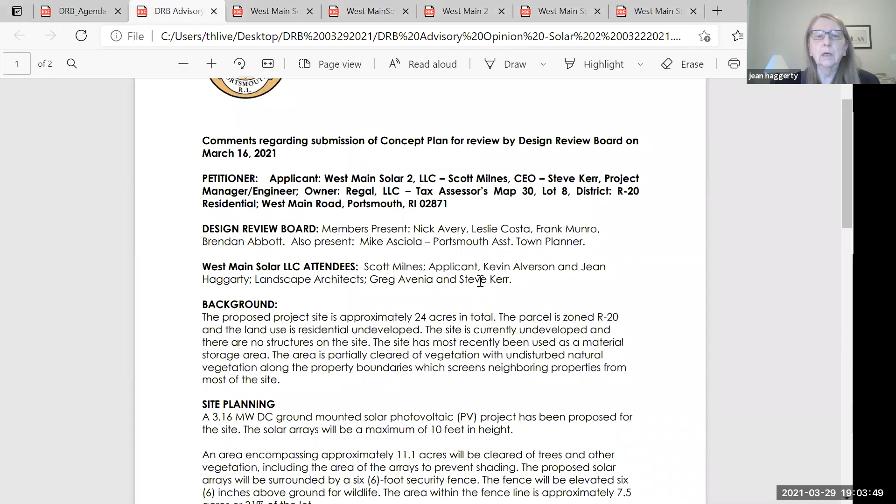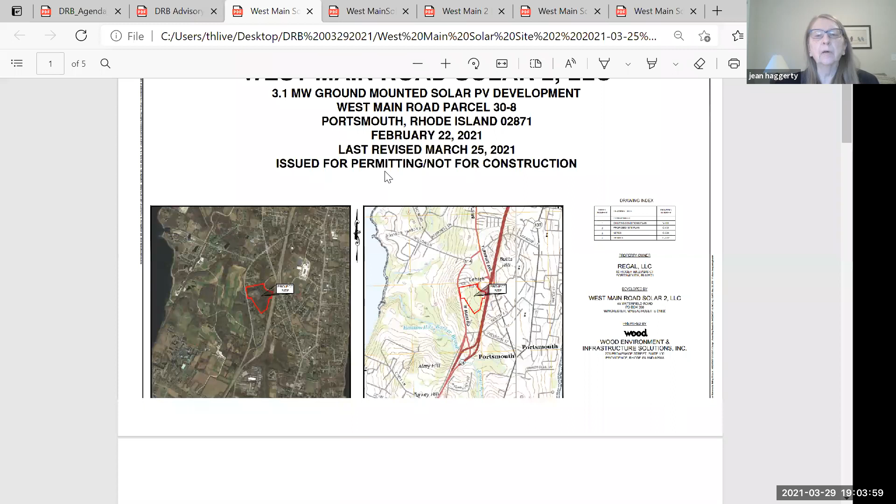Absolutely. Good evening, everyone. So when we spoke about 2 weeks ago, there was a couple of issues with the plan that we were still working out. Specifically, one of them was related to wetlands on the site. Since that meeting, we've had the wetlands flagged, and we have adjusted the site layout a bit. So if you go to the next sheet, one more sheet over.

So right down the middle of the plan, you'll see a line that's where the wetlands are. To the right is where the actual wetlands flags are, and the darker line is actually the buffer zone. We're trying to stay away from the wetlands, and as a result of that, we moved them inland, so they came more to the west since last time we talked to you.

That changed the array at the southeast side. We moved that a bit, and it resulted in some of the panels moving to the top left. So that northwest corner has a little more panels, and we've gotten further away from the wetlands.

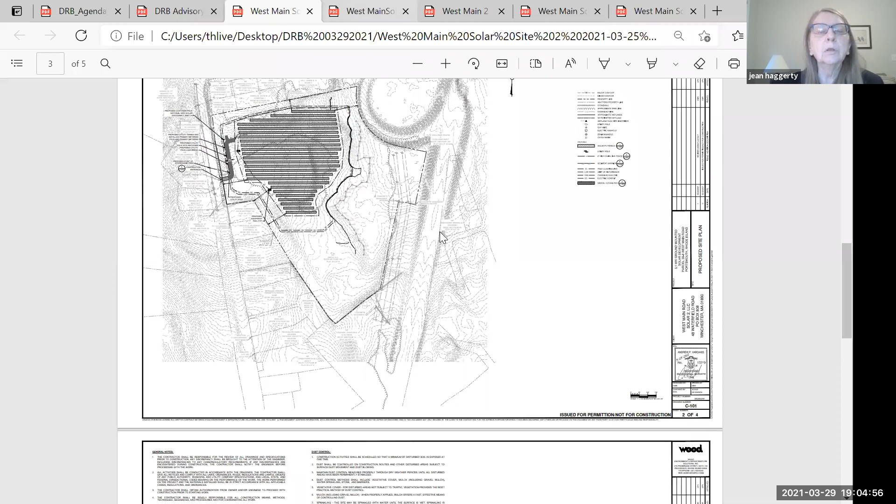As a result of that move, we also made some adjustments to the landscape plan. As we talked about at the last meeting, one of the big concerns was that the screening be appropriate, that we basically make sure we screen from all the different residential properties and from the roadside. On the top right-hand corner, that is the ramp from the highway. The wetlands all flow in that direction, so we're not having to move anything related to drainage on the street side. It'll all be on the inland side.

So tonight we have Kevin Alverson with us. He has revised this plan, taken into consideration your comments on the evergreens and plantings and locations. I'm just going to have Kevin quickly give you an update of what he's changed from the last submittal.

Good evening, everyone. Can everybody hear me? Yes. Great. My name is Kevin Alverson. I'm a landscape architect registered in the state of Rhode Island, office based out of Wickford, Rhode Island. I wasn't able to attend the last hearing, however I did review the board's comments on the landscape plan, and as Jean mentioned, responded also to the modifications to the alignment of the array based on the revised wetland flagging.

We were able to modify the planting design to utilize more evergreen tree species, particularly along the southwest portion of the site, which abuts some residential areas. As Jean mentioned earlier, the modification to the solar array layout required some additional buffering that we've placed along the northwest portion of the site, indicated at the top left area of the site.

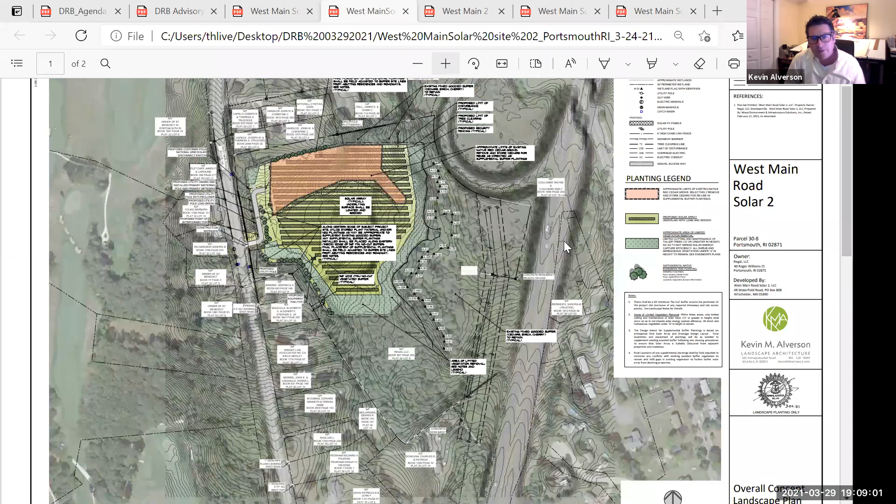You can see on the western side of your screen that we're actually trying to utilize and supplement plantings in that area as well, so we can minimize any views that come from the West Main Road portion of the site. In a nutshell, those are some of the revisions we've made to the plans in response to the comments we had, and also in response to the realigned wetland flagging out there. But I'm happy to answer any questions the board may have on that behalf.

Why don't we start with any board member that would like to ask questions to Kevin?

So what's the depth of the planting from a residential property line to where dense vegetation would be? What's the depth of that?

Along the western and southwestern areas, we have a 50-foot no-cut buffer that's existing. Then on the western side where the roadway is, we'd have about a 15 to 20-foot planting area.

In the southwest area, what we envision doing is having the no-cut buffer, a 50-foot minimum, and then a 15-foot plus or minus planting area where we would have to cut down some of the vegetation in order to place the plantings there.

But between that supplemental buffering and where the fence line for the array would go, we would have another 50 to 75-foot or so area, what we're calling a selective clearing area, which would really require just cutting any larger tree vegetation - anything over the height of, say, 12 to 14 feet - in the interest of trying to minimize any shade casting that might happen onto the solar array.

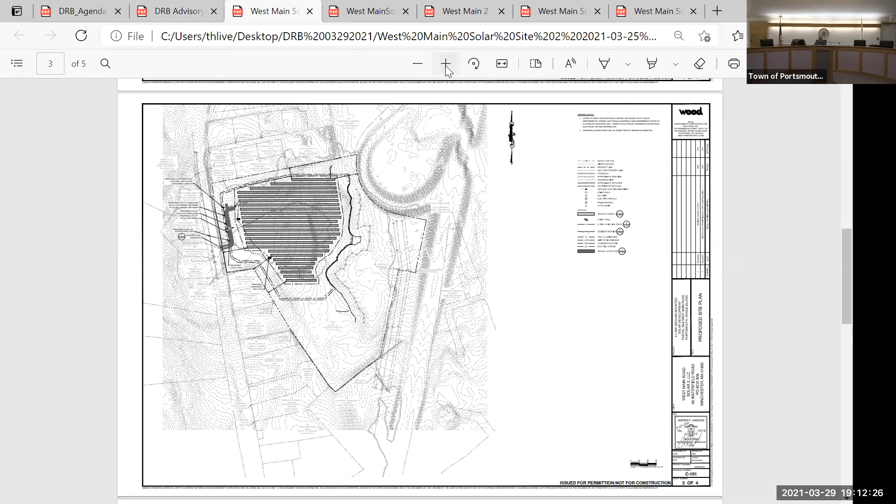So that corner, Kevin, the topography drops off pretty quick there. I'm having a little bit of trouble reading the topography lines. What is, say, from the fence to the abutter, to the closest abutter, like Jimmy Hall's house, for instance?

This is in the north, right, exactly right there. So I know you can't see this from the off ramp on 24, I've looked. And you really can't see any of the houses either. But my question is,

if we lose some of this taller vegetation, is he going to have a line of sight to it? Or are these replacement trees, the eastern red cedar, the pitch pine, will they grow enough in enough time to block that, to give it greenery year round? Is that the premise behind cutting down some of the bigger trees?

Yeah, at the northern portion of the site, we actually don't need to do any of that shade pruning because it doesn't cast the shade down onto the array. So quite literally where the line that you can see on your screen there that says TC, that's the tree clearing line. We don't envision any clearing, any shade pruning or anything necessary between the property line and that point.

So the existing buffer from that limited disturbance and tree clearing line to the property line with Mr. Hall's property would remain as is. There is some pretty considerable cedar vegetation that's in there.

So we don't anticipate having view lines into there, but it's certainly something that as the design is developed further and as we go along into it, if supplemental planting is necessary or replanting of some of those existing cedars that need to come out, that's going to be something that we'll be looking to do as part of this.

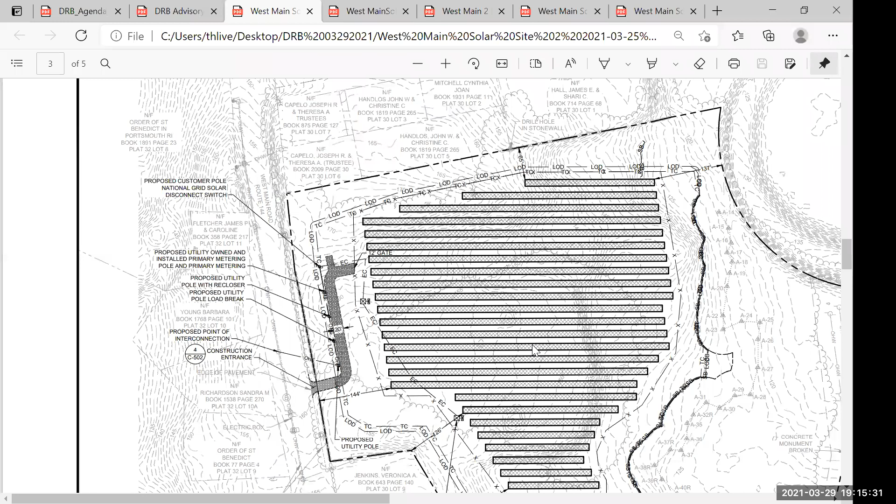Nick, could you weigh in, or I don't think Leslie has had a chance to join us yet. She's driving back from Providence and was going to try to call in.

Yeah, I guess if I could step in just to hopefully respond to that. I've done several of these facilities, and just the nature of the beast, I suppose, when it comes to planting a visual buffer.

It's really dependent on what the vegetation is within those areas in terms of distance and width. So the type of buffer we're proposing is a staggered, multiple buffer. It doesn't necessarily look like a green wall per se.

In some really tight situations, I've been able to accomplish that buffer in as little as 10 to 15 feet. In other areas, because we have more room to move, which is the scenario in this case, we can utilize the spacing better, planting within and around other vegetation that's meant to remain in order to cut down those sight lines.

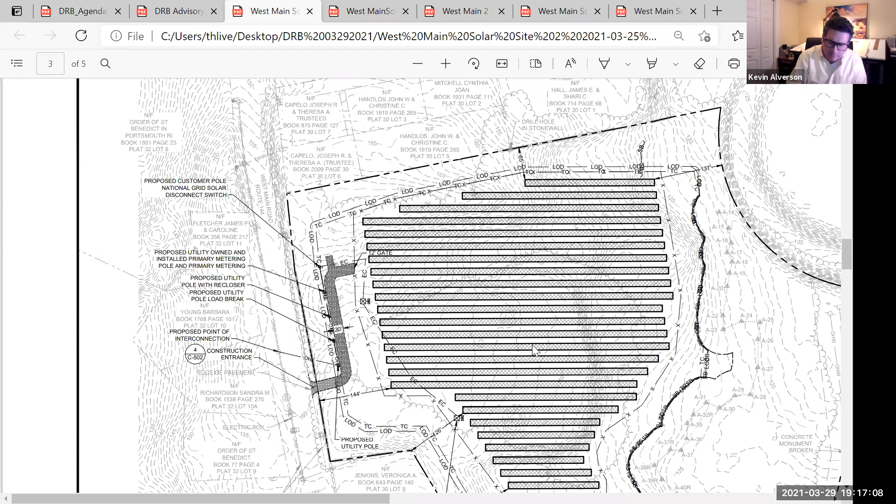As you can imagine, we can conceptualize and develop the buffer to the best of our ability, but until we actually take those trees down, we won't be able to see. We'll do everything in our power to minimize removal of vegetation, but then we'll see if you need a tree here, 15 feet this way as opposed to 6 feet that way. That's the sort of on-site buffer development we like to do.

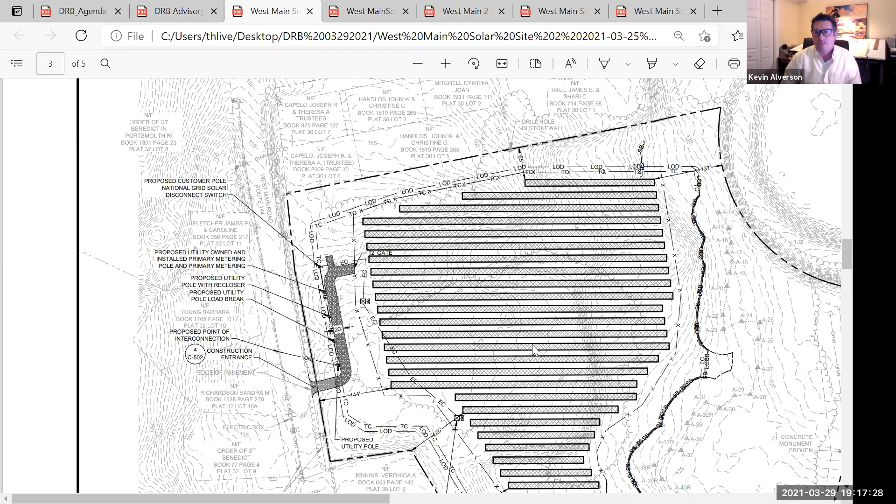Any other questions from any of the board members at this point?

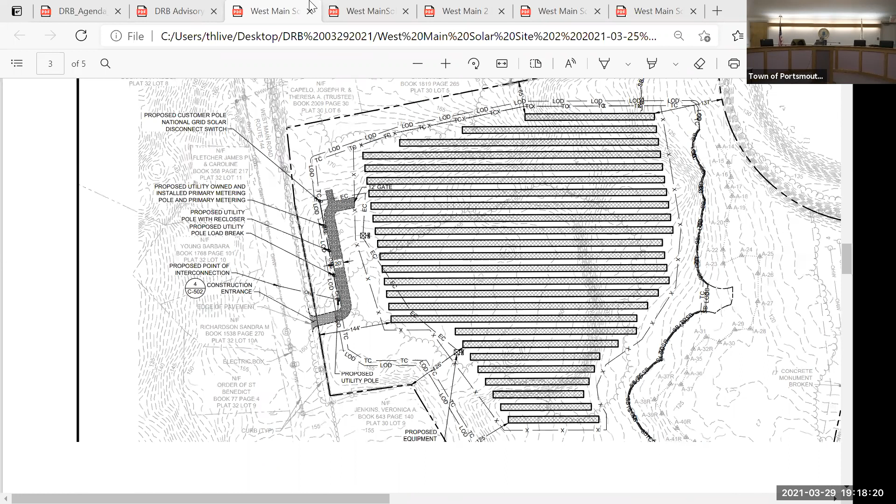No response. So if I could do a quick summation, and correct me if I'm wrong, Kevin — you've delineated the wetlands to the south and east. The array has moved a little bit up to the north. You're proposing deeper vegetation along the north side, eastern cedars, pitch pine. You've kept the original opening coming off of West Main Road, which I like, because it's dangerous up there trying to get in, but you're not making a second cut — it's already there. It probably has to be widened a little for visibility.

What else did we cover that members would like to add that I didn't include in our opinion? I would love to get some input from Leslie on a more quantifiable definition of what dense planting is — I don't know the correct terminology. I found a paper from the Planning Advisory Service from 1960 out of Chicago that puts some numbers on things and some zones. If there's any way we could help define what's appropriate for the town of Portsmouth, advising the zoning board and planning board, I think that would be useful for our opinion.